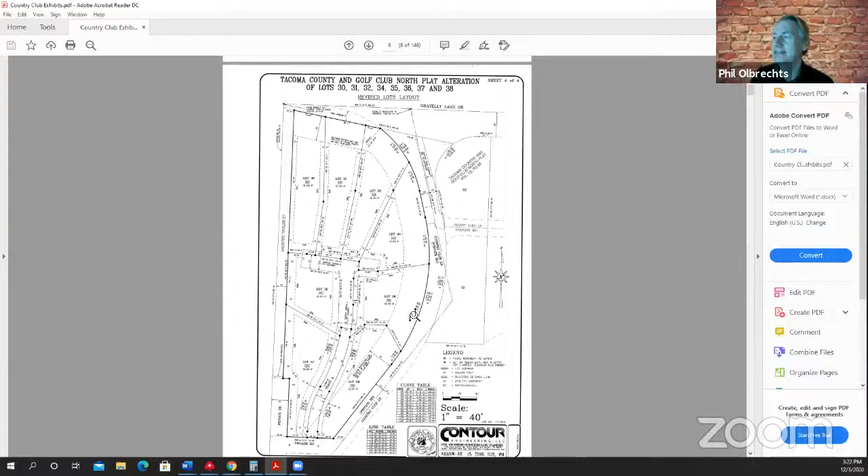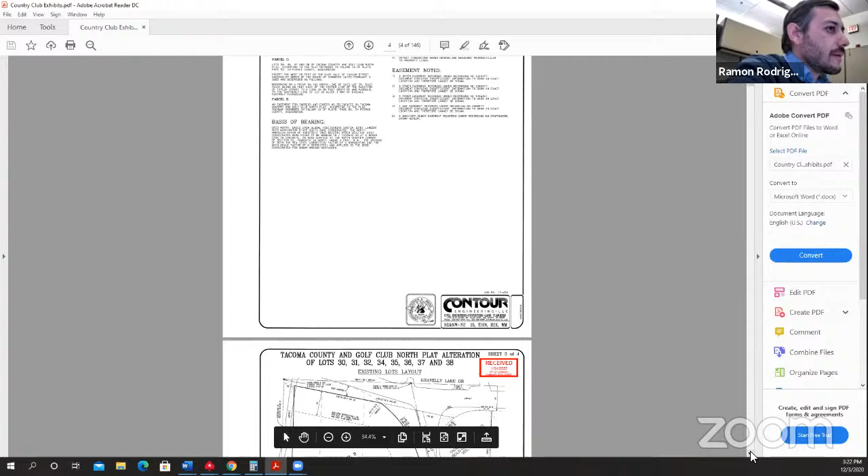But I'm more interested in how the road relates to the proposed configuration. I really want to know what this line is, if that's the actual location or the easement. The hard solid black line is the edge of the plat, but you can see it's offset approximately 40 feet to the east, which is where the road is at the entrance.

Okay, currently. So you see that second line, that's more like the drive approach. All right, yeah, because I was trying to understand, I'm just trying to figure out where the... Yeah, so you see it a little better on... that doesn't really...

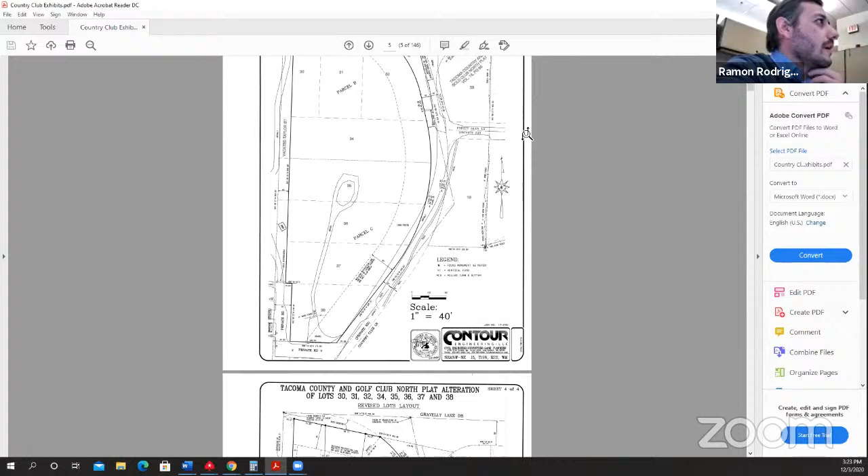What I really need is to know how this road interacts with the lots in the buildable area. So this isn't going to show it for me then. Not really, right. This doesn't depict the 60-foot setback then.

So up on the north portion of the plat, the road is off away from the plat about approximately 40 feet. But it does encroach on the existing lots on the southern portion, and it's shown on page 3 again. If you go up, you'd see the encroachment on page 3, not page 4.

Okay, so this dotted line, what's this dot? That's the building, the original building restriction line that was established at the time of the plat. So the building restriction line is supposed to be 60 feet from the road, right, according to covenants or not? It doesn't say from the road, it just shows it on the map.

I see. So this line is pretty well set, it's not dependent on the actual location of the road. Right, so we have the covenant saying it's 60 feet from the road, and then we have the map. Well, it doesn't say from the road, it just shows it on the map.

Oh okay, so there's no covenant because there's no copy of the covenants in the record, so I don't know what it says. My understanding from the letters is that there was supposed to be a covenant saying 60 feet from the right of way, which is shown as 60 feet from the right of way. I don't think there's verbiage that says from the road.

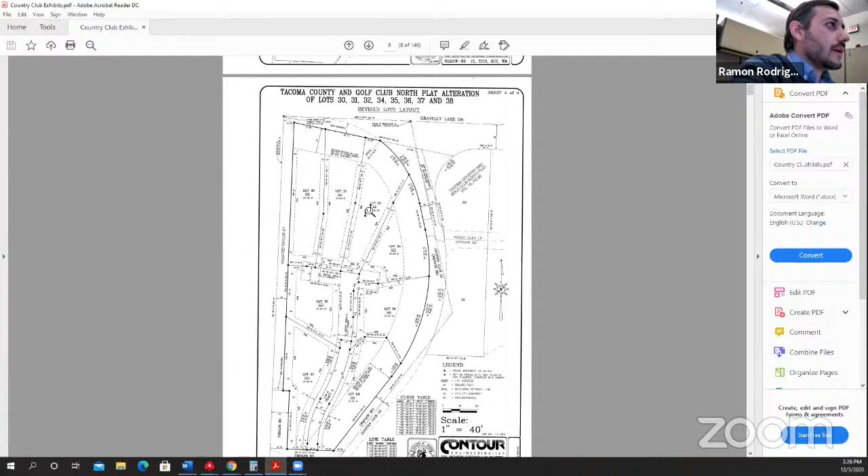Right, but the Eisenhower letter - right, so the history of the property is that they've been dumping organics there, and so as part of the site development permit, they'll export a great deal of that, and then we'll examine whether a geotechnical study is required to see the existing conditions of the slopes. Yeah, so there's a lot of compost from the golf course that was placed here, and that's kind of what created the steep slopes.

Is that the underlying problem? Correct. And you're saying that at the building stage, the city's critical areas ordinance will require a geotech report if there are those slopes. Right. Is there a possibility that under the critical areas ordinance, one of these lots would be rendered unbuildable? It seems like with artificial slopes, usually you can just get a geotech analysis of how to excavate it properly, and then you're good to go.

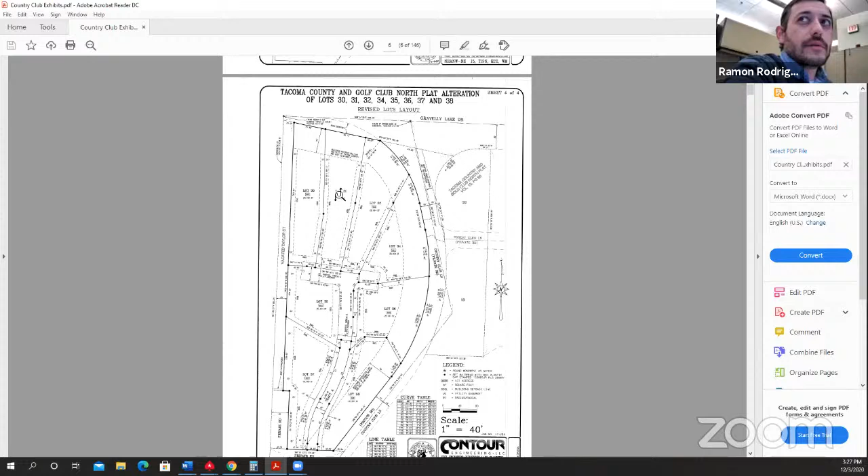And I read the geotech report - they seem to already conclude that's possible, right, with the correct configuration. All right, okay, so that's covered. Let's see.

All right, I'll ask if there are any objections. I want to get those CC&Rs in. As a hearing examiner, I don't have jurisdiction to render any final interpretation on what they mean. That's up for the courts, but it's my responsibility to see if there's any likelihood that any of the resulting lots would be unbuildable or difficult to build. So I think the covenants are relevant for that purpose.

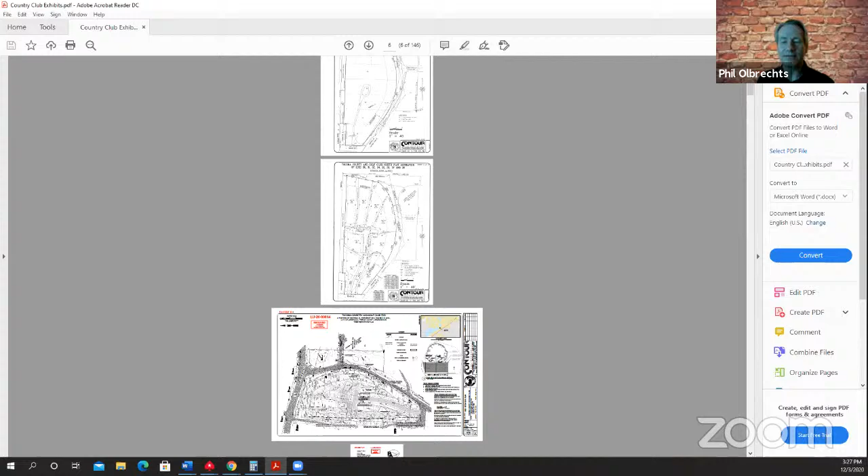Let me stop share here. I'm going to put up my exhibit list that I have so far. So we're at exhibit 23. Are there any objections to entering the covenants for this plat as exhibit 23? If there are, raise your hand.

I see there's a Robert Casey. Mr. Casey, was your intent to object there? Can we unmute him, Ramon? Yes. Okay, Mr. Casey, and you'll have to unmute yourself too. Did you have an objection to entry of the covenants?

No, before the hearing, I think it was yesterday or the day before, I told Mr. Rodriguez that as counsel for one of the parties of record, I did want to reserve the right to be able to make inquiries of the witnesses. That was why I had raised my hand at some point there, because I wanted to be able to ask Mr. Rodriguez a question or two about his staff report.

I'm not objecting to the covenants coming in. Those should be a part of the record. They're a part of the permit application requirements, I know, so they should be in the record. All right, so I'll admit Exhibit 23.

And Mr. Casey, yeah, you go ahead. If you have some questions of Mr. Ramon, you can pose those now.

Okay, thank you. My clients, the Conleys, own approximately a 2-acre parcel immediately south of this plat. It's a 2-acre waterfront parcel at 100 Shore Acres Road. They will be sharing an access with this proposed plat if it is approved, or the plat amendment is approved.

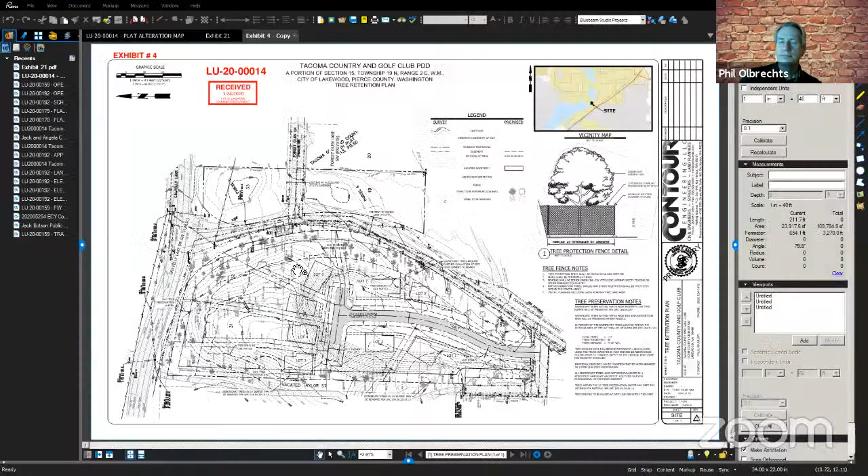Okay, do you want me to share the document, or should I just answer? I think it's up to you, Mr. Rodriguez, if you think that'll help clarify or answer, go ahead and share. Okay. So you're asking, what is the possibility of removal of the trees within the 60-foot boundary?

Let me, now that you have this up, it's a little easier to ask my question. So south is at the bottom. You've got vacated Taylor Street that you see there. And then my client's property is immediately south of, I think, new lots 1 and 2. You can see that there is something right at the bottom of the page that says significant trees and 20-foot buffer may be removed, and it's got the ordinance.

I'm wondering what's the basis of trees potentially being removed in that area. Is it because it would interfere with the buildable lot area, or is it for view? I just want to have some clarification on that.

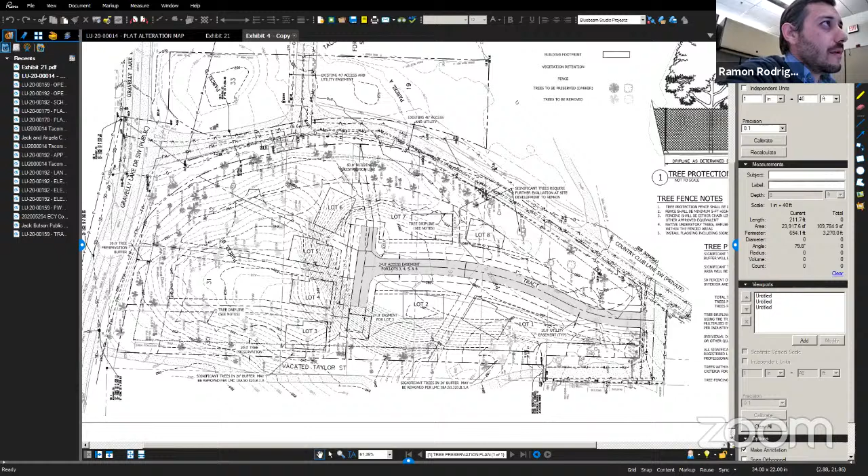Yeah, no. So I believe what that section is allowing for is removal of any trees that would be necessary due to development. So that's an exception to the code that you should maintain a 20-foot perimeter buffer, with the exception that you need to remove, let's say, for a driveway, utilities, things like that.

Okay, I guess my concern, looking at page 3 of your staff report, it's got the tree preservation requirements, lists the relevant ordinance, and then has perimeter trees, and gives the basis for trees that may be removed. My concern is it's got a reference there to vision clearance, and I want to make sure vision clearance isn't to improve view and wouldn't be applied in that area. It sounds to me that's more something that would apply to sight distance, view issues on entrance and exit roads, that type of thing.

Is that correct? Correct. Okay. So trees can't be removed within that buffer purely to improve views, but it could be because of the other listed criteria in there. Right, to allow for development, access, utilities, things like that. Okay, good.

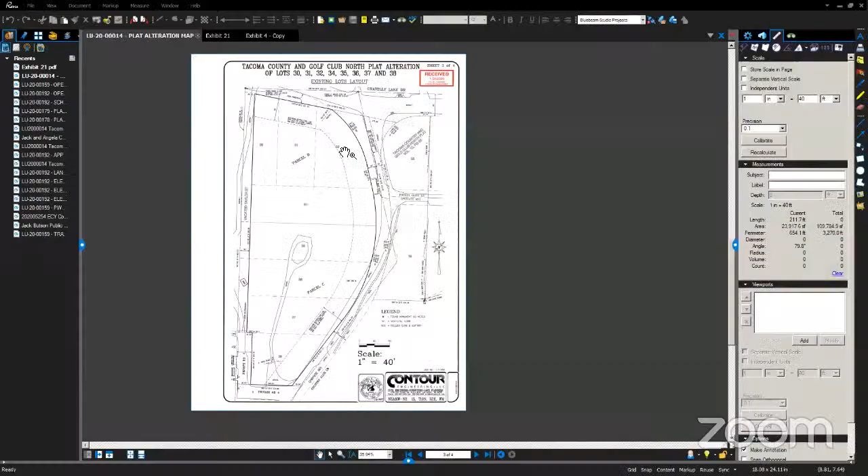Then the next question is on the easement road, or the main road for the country club, which encroaches into this parcel. The hearing examiner raised some question about that. I guess you'd look at Exhibit 3, pages 3 and 4. Page 3 shows the encroachment, and it's on lots 36, 37, 38. On page 4, it does still retain 36 and 38 as reference lots there, but that's where this encroachment is.

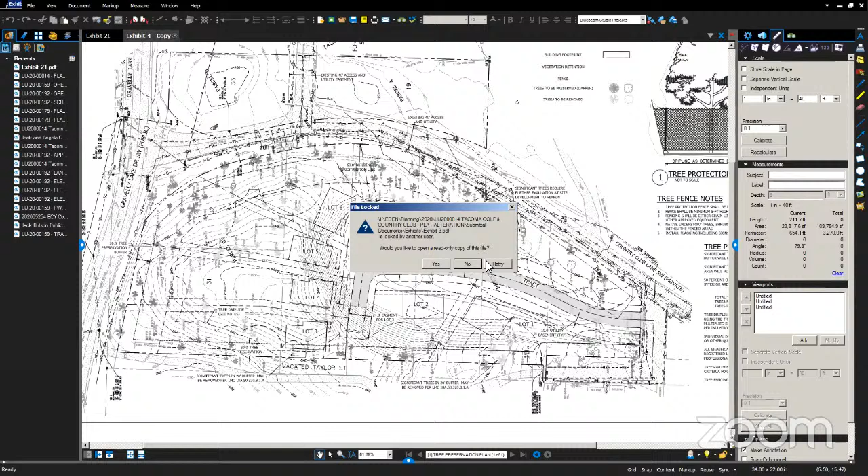I'm sorry, what is the question again? Okay, so the road encroachment, if it was shown on Exhibit 3, page 4, you'd see it on lots 36 and 38 of Exhibit 3, page 4, right? Correct. Okay.

And looking again at your staff report, I think it's in response to maybe a question that I raised. Let's see if I can find it here. I'm not quite clear what is going to be required of the developer, the owner, to deal with that encroachment.

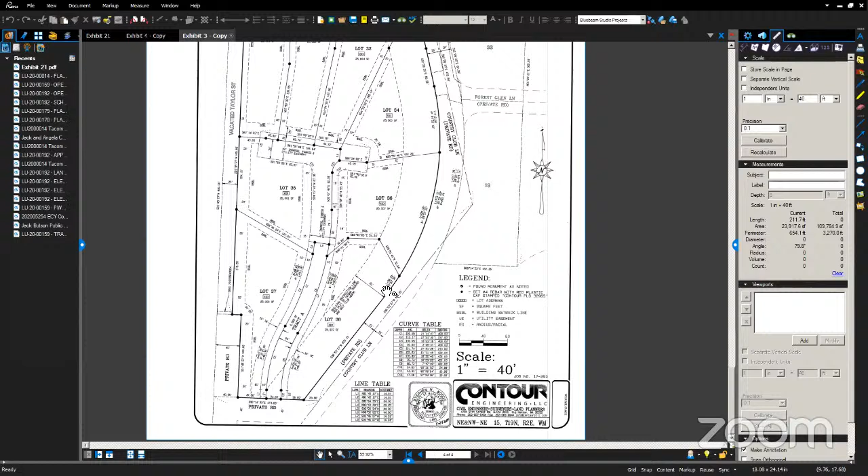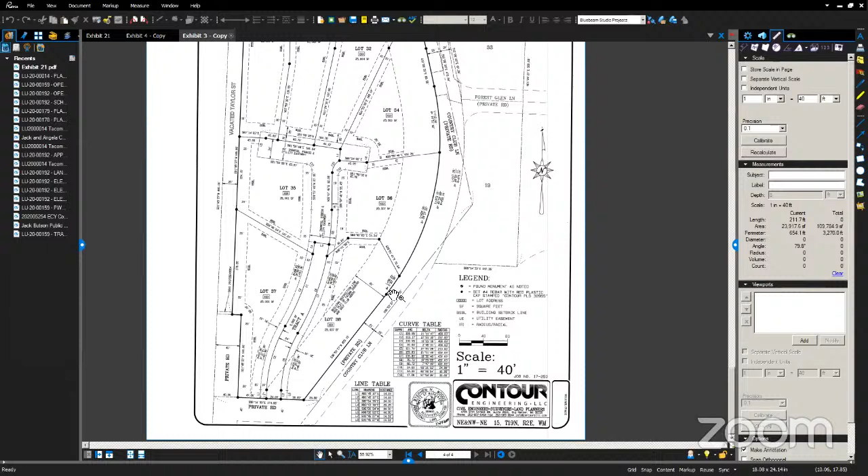Sorry, are you asking, does the road encroach on proposed lot reconfiguration 38? Is that the question? No, the way that I look at page 4, or actually pages 3 and 4 of exhibit 3, is that the country club road encroaches on what will be the new lots 36 and 38.

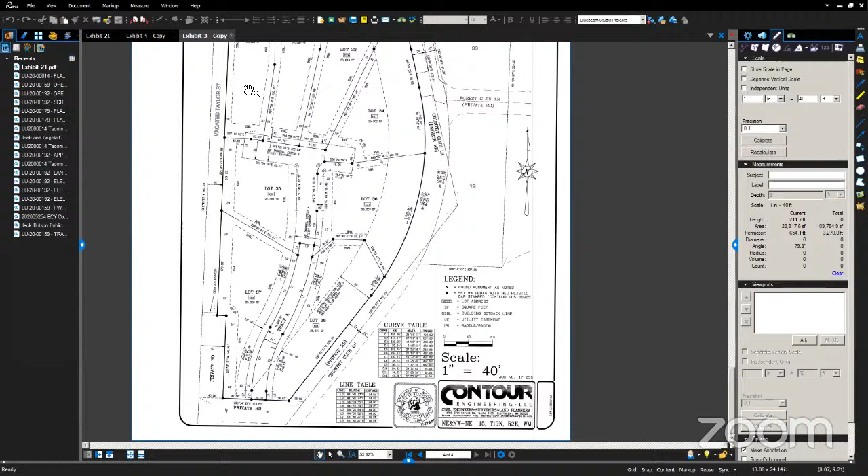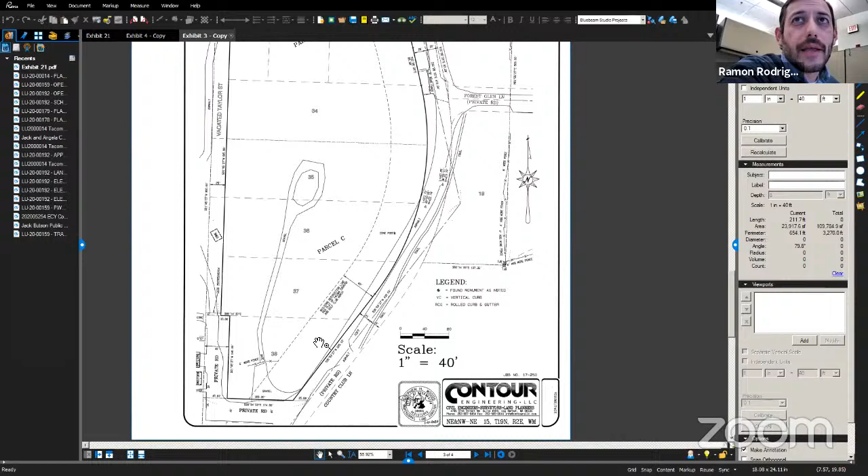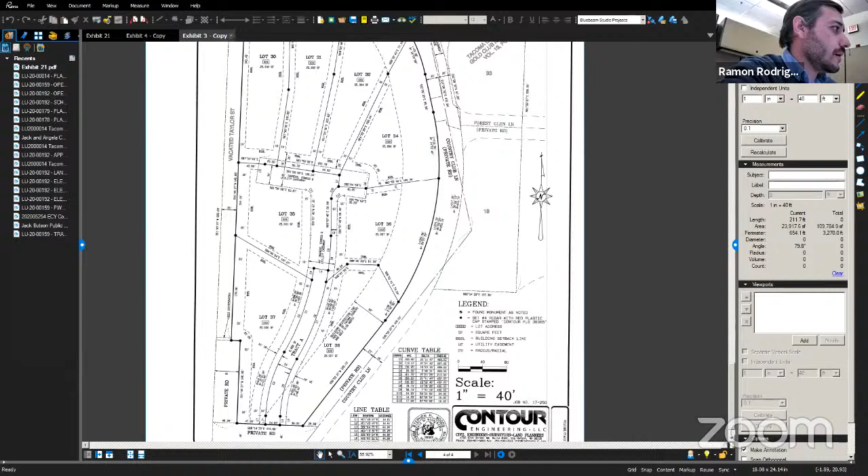Yeah, what's your question, Mr. Casey? Here's the road encroachment, you can see it shown here on page 3, and it encroaches on existing lots 36, 37, 38. I guess part of our problem is that encroachment isn't shown on the next page. Right, yeah, from my own drawing a line there, it appears it's on lots 36 and 38, for the new proposed lots.

Okay, now let me go to your staff report, the bottom of page 5 — I'm dealing with the one that came out yesterday, with the staff response to the issues I raised in my letter of last March. The last paragraph, just above agency comments, says: in order to align the 60-foot building restriction with the existing road, the applicant would have to provide an agreement signed by all parties subject to the covenants, providing the parties agree to terminate or alter the relevant covenants pursuant to RCW 58.17.215. So my question is, what happens if there is no agreement with the other lot owners in this plat to make a change?

So my response to that comment was about whether or not that building setback line should be altered. My response would be, the applicant is not proposing to realign that building setback line. In fact, if they tried to establish that building setback line, since that easement affects everybody in the plat, they would need agreement from everybody to alter it. So they're not proposing to alter that, but we also don't believe they need to, based on how the plat was set up and what the building restriction line shows on the plat.

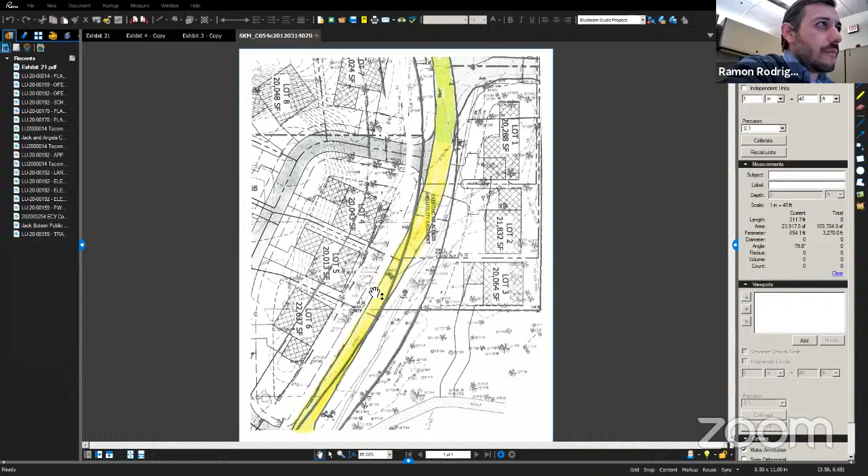It would be based on the opinion that the road is a, I'm blanking on the term, easement by prescription based on how it's been used, and easements count towards the gross square footage of lots. Okay, now we know this isn't an express easement, but are you saying then that easements by prescription count toward it? Because it's been that way since the 40s when it was established.

Okay, I think that answers my questions. Thanks, Mr. Casey. So, Mr. Rodriguez, just to clarify, the standard position on the city in interpreting minimum lot size is that private easements—does that include private roads as well—count towards the minimum lot size?

Not a private road that's set up on a tract. Oh, I see. Okay, so if it's in a separate tract, you wouldn't count it. But if it's just some access easement, then yes, it does count towards it. And has that issue come up before in applications before the staff? Is this an interpretation staff has applied throughout the years, or is this the first time you've dealt with it?

This specific situation, or easements in general, it's outlined in the code that it is counted towards. Oh, it's expressly in the code. Okay, all right. Do you recall where in the code that's addressed? That easements are counted towards—I could possibly pull it up here shortly. No, I just thought in case you know off the top of your head. That's part of my job. I don't know the code section, unfortunately.

Okay, that's fine. If you've still got me on here, I think I do. Okay, I think it's code section 18A.60.110C. Oh, perfect. Okay, thanks. And it refers specifically to easements—it doesn't say anything about prescriptive easements.

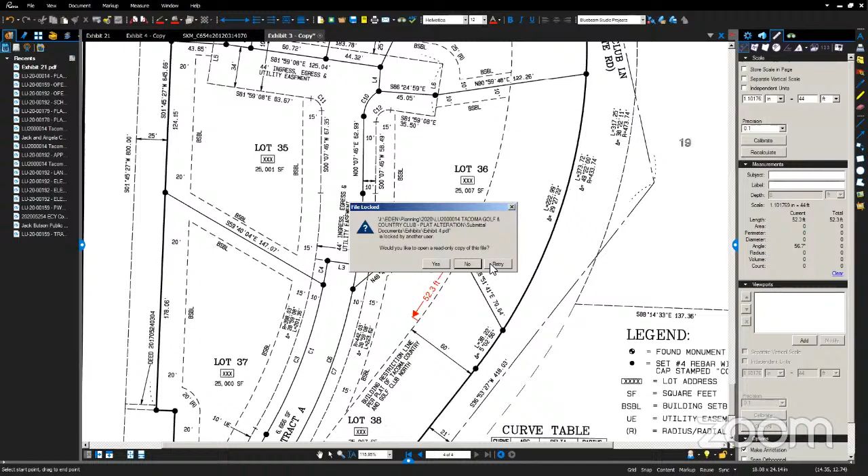A couple other issues: there is a concern for my clients, raised in our comment letter back in March, about the ingress and egress point for this plat. Looking at exhibit 4, the topo exhibit with the tree preservation plan, you can see Country Club Drive running north-south, and the turn into Shore Acres Road, a very short road, where you'd then take a quick right turn into the plat. If you go straight on Shore Acres Road, a very short distance, there are 5 homes with their point of ingress and egress there. So you will have 5 homes entering and leaving at the same point where this new road provides ingress and egress for this plat. There's been no study of that - issues like sight distance entering and leaving, and queuing.

I would ask that as a condition of approval you require a traffic report addressing the safety concerns of that area. I think Mr. Quinn has covered the issues with the road and encroachment onto at least 2 of the proposed new lots. But it's for the representatives of the country club to say they're preserving all this buffer along the access road - with what they're proposing, they're not doing that. They are proposing to eliminate at least 7 or 8 feet of what would be the buffer there. If they agreed to move the road over, they could preserve the 60-foot buffer. But what's been submitted doesn't do that, so it's disingenuous to say they'll fully preserve that 60-foot buffer if this is approved.

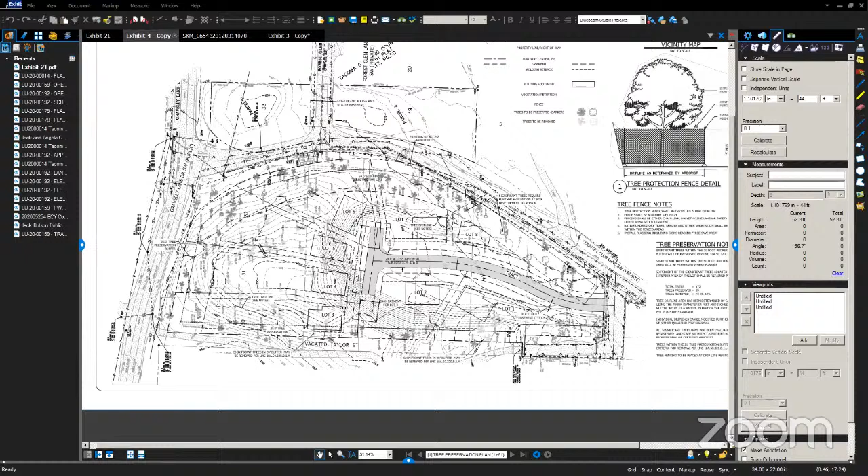Okay, thank you, Mr. Casey. Mr. Rodriguez, did you want to respond to those comments? Actually, I wanted to defer to Frank Sawatsky with Public Works to clarify issues about the road. Okay, let's get him up there. I should be unmuted now. All right, there he is. Mr. Sawatsky, are you sworn in? I am sworn in, sir. Okay, go ahead.

Earlier in the hearing there were questions about the 60-foot buffer and how it is defined. In the Plat of 1946, the legal description and the illustration survey that goes with it clearly indicate that the 60 feet is set back from the bold line shown on sheet 4 of 4 in the exhibits presented. There is no mention of the existing trail or private roadway in the 1946 Plat.

There is mention of a 60-foot setback from the road for Forest Glen Lane, but that was later modified in 1948 to only 35 feet. As far as the platting is concerned, the road was put in 1921 based on the earlier plat of the 84 residences, but it was not defined exactly where the road is. The 1921 plat just has an arrow pointing northeast saying continue road to Gravelly Lake Road, which was a highway back then. So the placement of the road in 1921 was not defined.